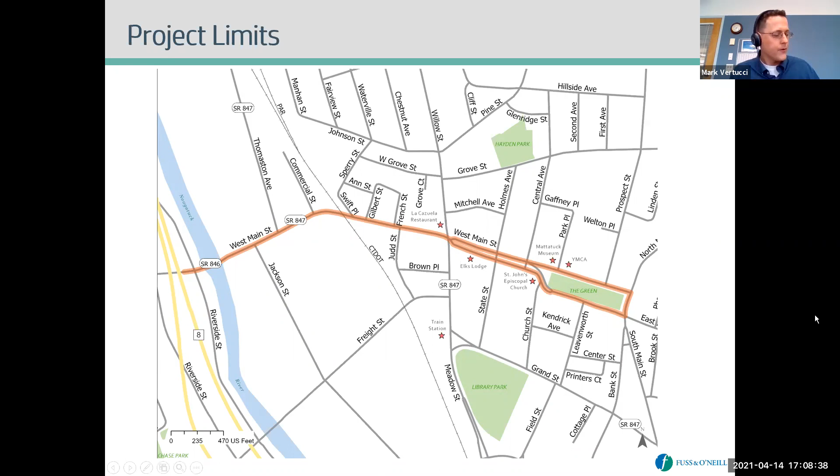The background of this project is that West Main is a major east-west corridor in the city, not only for vehicles but also for transit and several bus routes. It's a gateway to downtown from points west and the Route 8 Expressway. This road has been plagued by vehicle congestion and safety issues in certain areas that we need to mitigate, and there's a real lack of multimodal facilities—pedestrian, bicycle, and transit amenities are all lacking. This is really the impetus of the study: to look at these issues and come up with solutions to make it better.

The funding source for this project is 80% federal, 10% state, and then there's a 10% match that the City of Waterbury is putting up.

So moving on, existing conditions. We've done some analysis of all the issues in this corridor, which I'll explain in a minute.

But I wanted to bring up a poll question first and ask everyone in attendance: how do you most often use West Main Street? Do you live close by? Do you use it to access businesses, shopping, or restaurants? Do you take the bus? Is it more for walking, running, or biking, or mainly in a vehicle to get from one place to another?

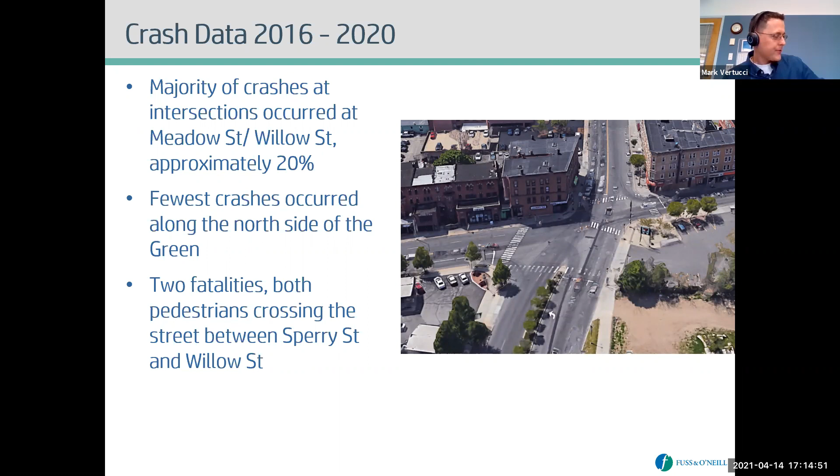Moving on to the next slide, traffic conditions. We ran a traffic model to determine where vehicles are getting hung up, where's the congestion, and where vehicles are queuing or stacking at intersections.

What we found were the worst locations: the Watertown Avenue and Riverside Street intersection near the western end of West Main Street, closer to Route 8, Thomaston Avenue as well, and then Willow and Meadow Street in the middle section of our study area. Those areas we're going to need to look at for potential mitigation of congestion issues.

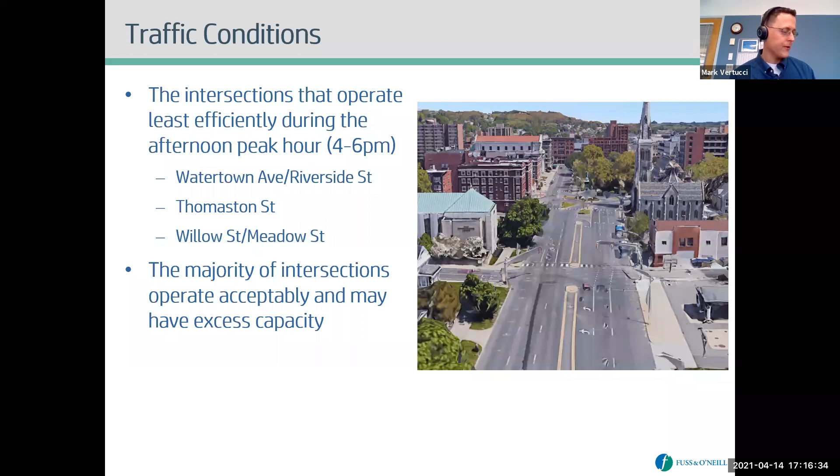Outside of those problem areas, much of the rest of the road actually operated pretty well and had excess capacity. Near the Holmes intersection, we've got 6 lanes of traffic, but we really don't need that many lanes. This is an area where we could road diet, reducing the number of lanes to provide more space for other accommodations, such as bus pull-offs or bicycle lanes, and shortening pedestrian crossings. Different sections of the corridor will have different needs—some need to concentrate on traffic flow, while others can be reduced to provide safer multimodal facilities.

Moving on to parking. We did a brief inventory of what's out there, and found there is not a lot of on-street parking on the section of road we're studying. There's a little bit around the green, but only about a quarter of it has on-street parking. There's not much west of there, a little more as you head west of Willow and Meadow, and the whole western section of the corridor has nothing to show—no parking out there. So we have a general lack of on-street parking.

There's not a lot of off-street parking either. The lot by Judd Street has about 50 some odd spaces, and other than that there's not much off-street public parking. There is a proposed project the city has—they're going to construct a new lot up by Prospect Street, shown as the dashed area in blue. That will provide some benefit in adding more parking in the general area of the green.

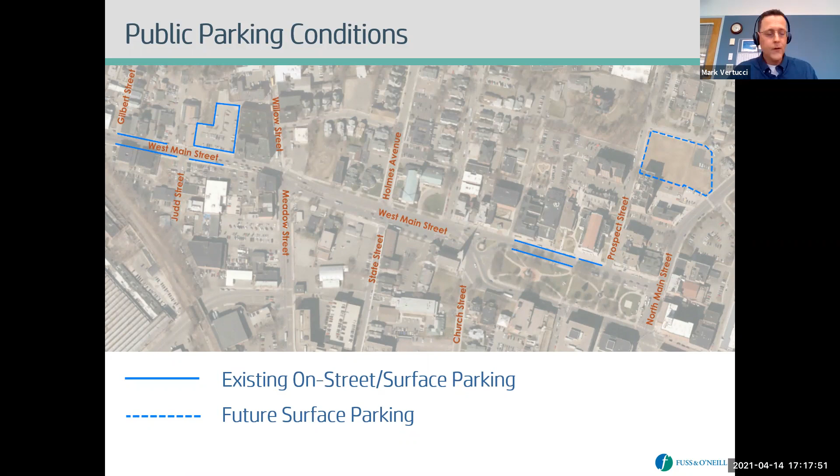Moving on to sidewalk and crossing amenities. West Main Street is really lacking here—a lot of sidewalks are in poor condition without ADA accessible ramps. We have excessive crossing widths where the road is really wide, like in the Holmes intersection area I showed earlier. There are also lengthy sections of road with no crossings at all. This picture, east of Thomaston Avenue, shows a pedestrian attempting to cross a busy road, and there's a similar situation over by Sperry Street. This is something we need to look at closely, adding more crossing areas for pedestrians.

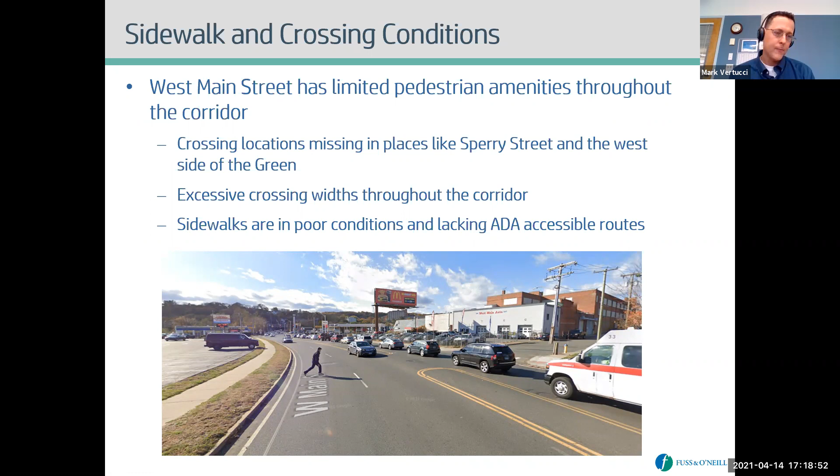As for bicycle facilities, not much to say here on West Main—the whole road is pretty much lacking. There are no bike facilities at all: no signs, no sharrows, no designated bike lanes, and certainly no separated bike lanes like what we see on Freight Street, which has recently been installed. We have something really good just to the south of this corridor, so we definitely need to look at improving bicycle accommodations on West Main Street to provide connectivity for bicyclists to these nice facilities installed nearby to the south.

As far as transit conditions, I'm going to turn it over to Francisco from FHI Studio, and he's going to review some of the things he's found related to transit thus far, and also talk about some work he's done on a market analysis.

Hey, thanks, Mark. As Mark mentioned, our team has a couple of transit experts on staff. They looked at the bus activity, the routes, and frequency—or headways—in the center of town. We see a lot of bus activity, and anyone familiar with the area would recognize that. There are 8 different routes that run through and stop downtown, serving 12 different bus stops. So we see significant volume of buses and riders, with a lot of boardings and departures from buses in proximity to the green mostly, but all along West Main Street.

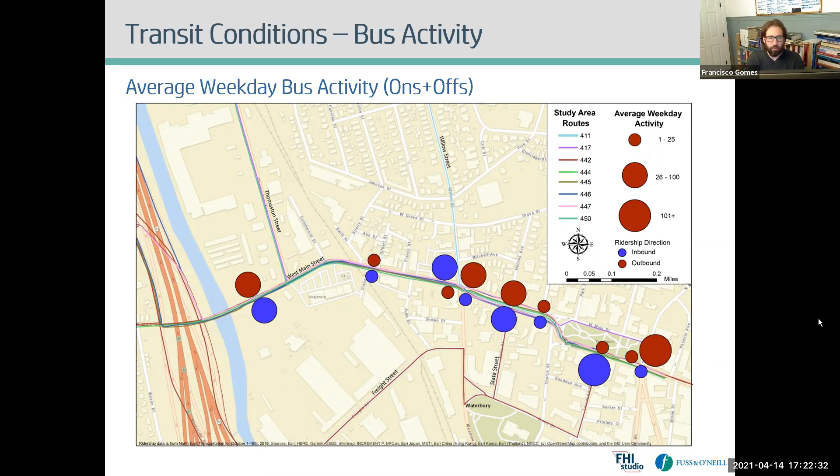Our team also conducted a market analysis of the downtown. The purpose of this analysis was to better understand what is driving trips to downtown, what the trends are, what the future might hold for traffic downtown, and what's going to drive trips in the future based upon existing market conditions.

First of all, the immediate area around the downtown within that 5-minute drive really struggles economically with respect to the residents. Median household incomes and per capita incomes are very low. And the further you get away from the downtown, so the more you push into the outskirts of Waterbury itself and further into the neighborhoods along the edges and outside of Waterbury to the surrounding towns, the median incomes and per capita incomes go up.

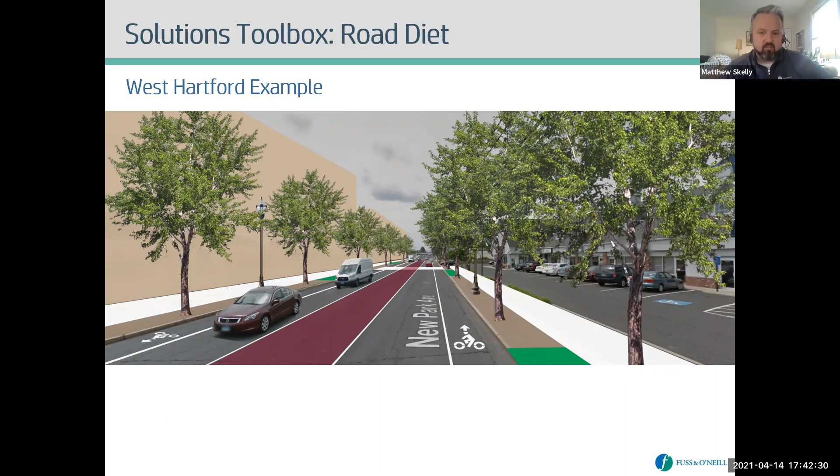If you want to go to the next slide. Here's another idea. We're calling this a boulevard concept.

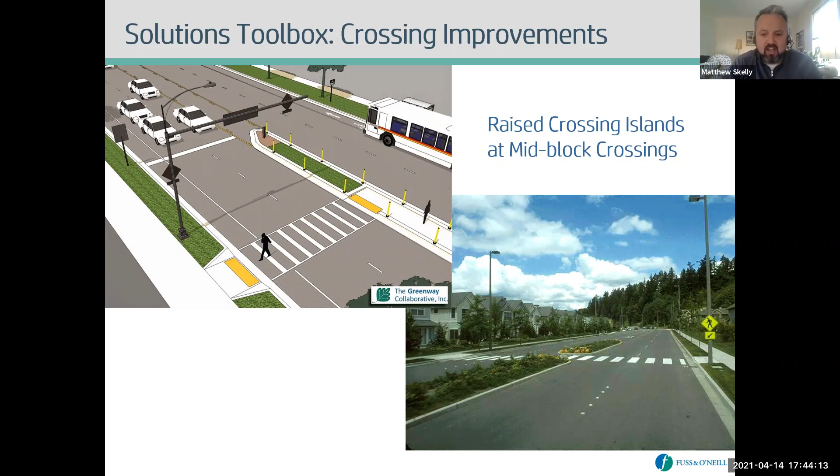In the lower right picture, we're highlighting what we'd call a refuge island that's been provided so you don't have to cross all 4 lanes at once. It gives you a little space to be in the middle and find another gap to cross.

Another crossing improvement, a couple ideas here. I mentioned that you could provide a signal to stop traffic and allow people to cross the road. That doesn't just have to be your traditional red, yellow, green. It could also be, on the lower right here, our high intensity activated crosswalk, often called a hawk signal. You're starting to see more of those popping up around Connecticut, all over the state.

This is kind of a step between having a full-blown signal and, maybe another option, the rectangular rapid flashing beacon. So you might look at it as the full-blown signal, the hawk signal, a little bit less of a control.

If you go a little bit less from the hawk signal, you get to the rectangular rapid flashing beacon. You may notice these on the sides of the roads, also a relatively newer treatment in traffic control. Those are the ones where you see the rectangular LED lights flash back and forth quickly. This isn't like a red light that a vehicle has to stop for, but we do find pretty good rates of improving drivers stopping for pedestrians trying to cross the street.

On the lower left corner here, you can see 2 rows of parked cars on either side of this 2-lane one-way street. What's been done is that instead of just having the sidewalk curb line running along the passenger or driver's side of those vehicles, the curb has been brought out in front of those cars where there's no more room to park. That means instead of crossing 2 lanes of traffic plus 2 parked car lanes, now folks only have to cross the 2 lanes of traffic. Makes it a lot safer and more comfortable.

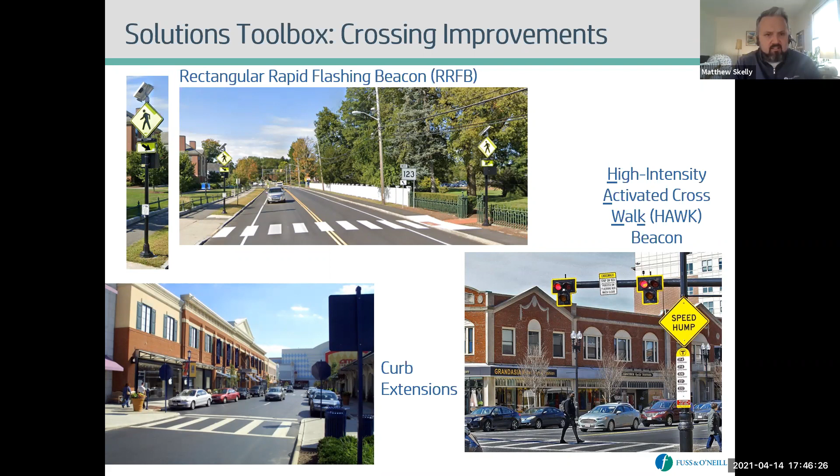The next page here, we talk about landscape design. In the upper left corner, that's an example of a tree grate that can be installed to help protect street trees. We're seeing more and more, over the last year and a half, outdoor dining has become a big part of all our lives. But it has also been used in the past to help provide some traffic calming in certain places. All these elements, street trees or roadside dining coming up next to the street, give you the impression that you need to slow down as you're driving. There's a lot of studies that prove that's effective.

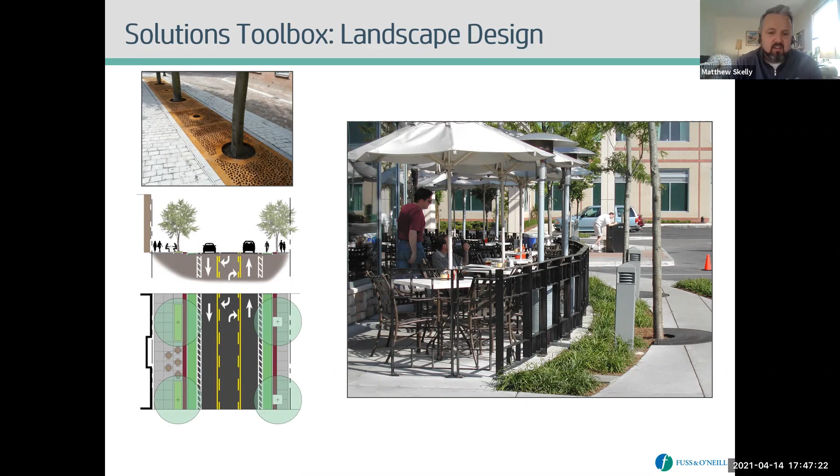Go ahead to the next slide here. Access management. This is an example of a pharmacy located in Waterbury, on the corner of 2 streets. This property actually has 9 curb cuts to get into it, which is dangerous, really.

You can see some of these curb cuts are basically in the intersection, and that is not ideal. That creates a problem with access management.

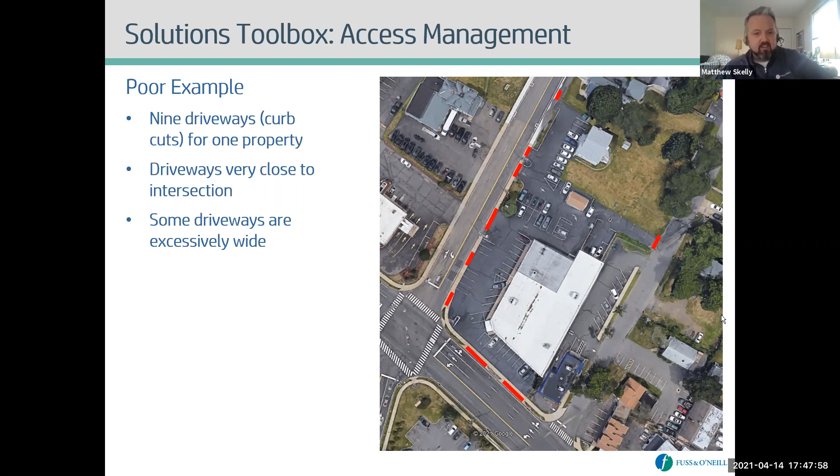So what we like to see, if you want to go to the next slide, this is an example of better access management. This is a large parcel, the Walgreens property right on West Main Street. You can see there's one signalized access drive to the left, a right turn out only in the center, and then a third access typically used for deliveries off of a side street. This provides a ton of street frontage, but doesn't provide all those curb cuts.

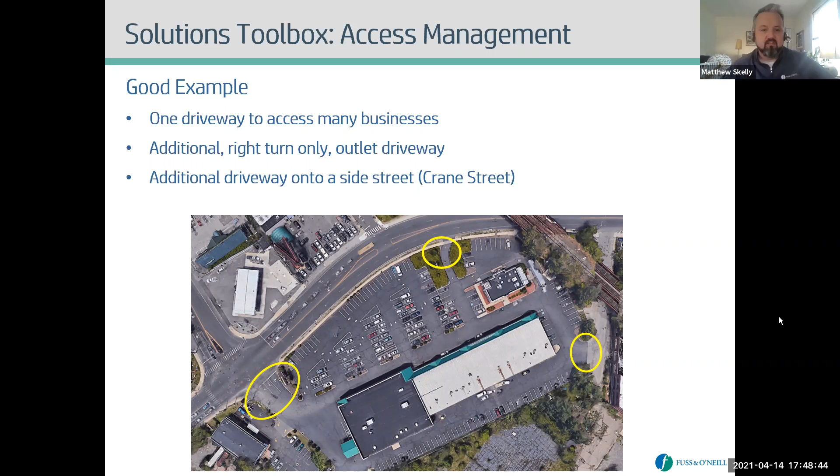That means there are fewer conflict points, fewer chances for people to be entering into the busy stream of traffic and potentially causing a crash, or crashing with a pedestrian trying to get across the driveway. In a complex environment, it can be difficult to spot those situations.

And the last solution in the solutions toolbox, bicycle improvements. This has been talked about a little bit previously in the presentation. There are not a ton of bicycle facilities out in this area, but you see in the lower left corner bike lanes. If there's room, that's a great thing. In the upper right corner, you see the Sharrow markings. They're like a reminder that bicycles are allowed to use the full lane of traffic - that is traffic law.

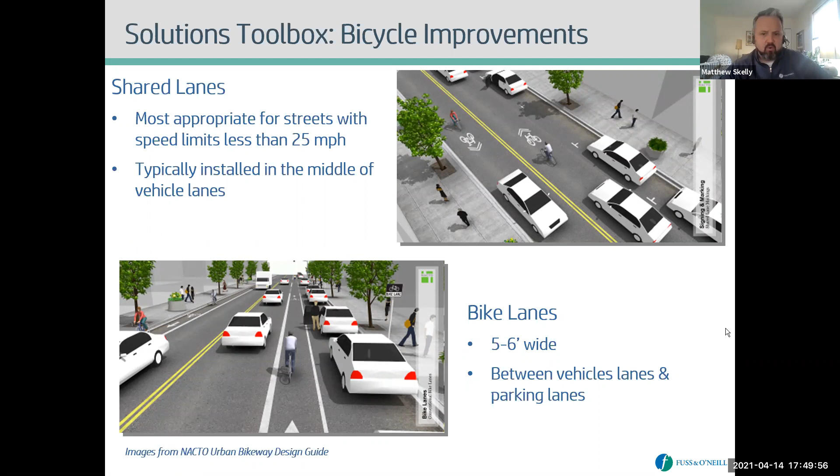In places where you can't fit bike lanes, Sharrows can be useful on low speed roads, but bike lanes are a 'if you build it, they will come' type feature. You may not see a lot of bicyclists out there on West Main Street today, but you never know when there's latent demand on a street where it's not comfortable to bike today.

So I think that brings us to our third and final poll question. So if you could add something new to West Main Street, what would it be? This is kind of a fun one to brainstorm. So better bus service, better bike facilities like bike lanes, better roads for driving, maybe additional capacity, better traffic signals, improved sidewalks and crosswalks for walking, more street amenities like street trees, lighting, benches, more parking.

Got a couple answers coming in here, three now, maybe we'll get one more. We see better roads for driving, improved sidewalks and crosswalks for walking, more parking. So, definitely seeing some of that same kind of auto-centric bias here on our answers. That's a good thing to note. I don't know if we're going to get - I think we've had four answers on the first two questions. Maybe somebody stepped away from their computer, but we can show what the results are here, and then we can get moving into the next.

So you can see that's just what I read out before. So let's get moving into our activity here. So this is the fun part. You can go ahead to the next slide, Catherine.

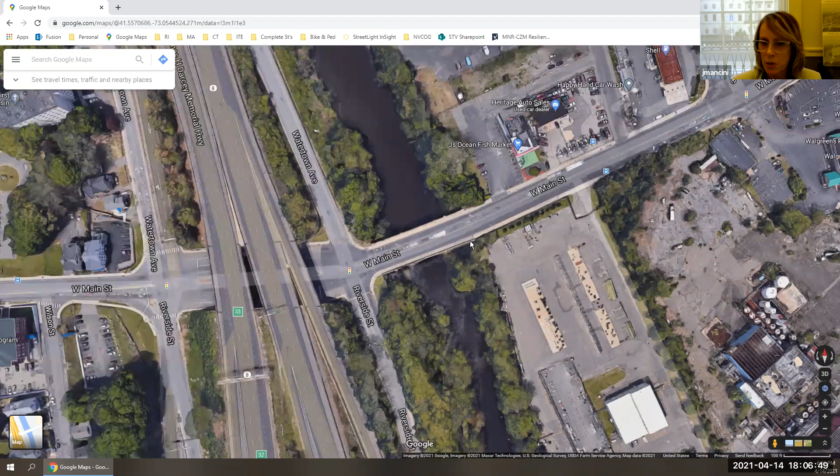It's really tricky. Hey Mark, this is Judy. I just want to clarify, coming out of Jackson Street, that section of West Main Street is a state road. So we had to work through District 4 on our project to get direction on how they wanted the signage and everything to be coming out from Jackson Street onto West Main Street. So anything we would do there would have to be in coordination with the Department of Transportation, just as an FYI. Yeah, that's a good point.

I mentioned earlier, the western section of this is all state designated road. So fortunately, we've been having project advisory committee meetings, and we have representatives from the DOT who have been sitting in on those meetings and providing some good information to help inform the study. So yeah, thanks, Judy, for that.

Okay, if there's anything else on this section, certainly let us know, but if not, let's pan to the east a little bit, Catherine, and we'll talk about that's Thomaston Avenue, and then the little shopping plaza there with the Walgreens.

A couple things we saw with this section, we use this as an example of good access management on the south side of the road with the Walgreens Plaza. But you look up on the north side, there's quite a few curb cuts, where a private driveway comes out onto the street. I'm counting at least 4 or 5 on the north side there, east of Thomaston, and maybe another 4 or 5 to the west. So access management, as Matt presented earlier, is something where we look for ways to maybe consolidate curb cuts and have less points where vehicles are turning out. Usually provides for safer traffic operations. So that's something that we're going to be looking at, making some recommendations on the access management front in this area.